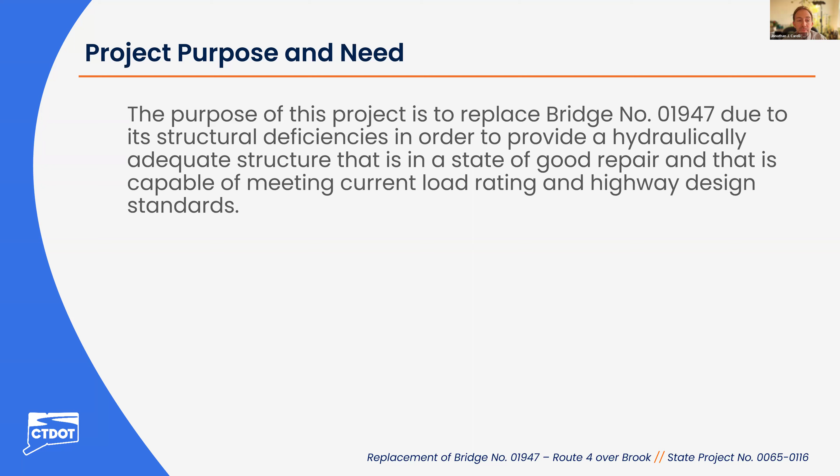The purpose of this project is to replace bridge number 1947 due to its structural deficiencies, in order to provide a hydraulically adequate structure that is in a state of good repair and is capable of meeting current load rating and highway design standards.

This is an aerial view of the structure. Route 4 goes west to east. The unnamed brook flows from north to south, as shown.

A couple things to note about this particular site. Just west of our bridge, there is a barn with a white roof. Currently, a portion of it is within the state's right of way, and it has been identified as potentially eligible for the National Register of Historic Places. For reference, the approximate location of the right of way line is where you see this tree line intersecting across the top.

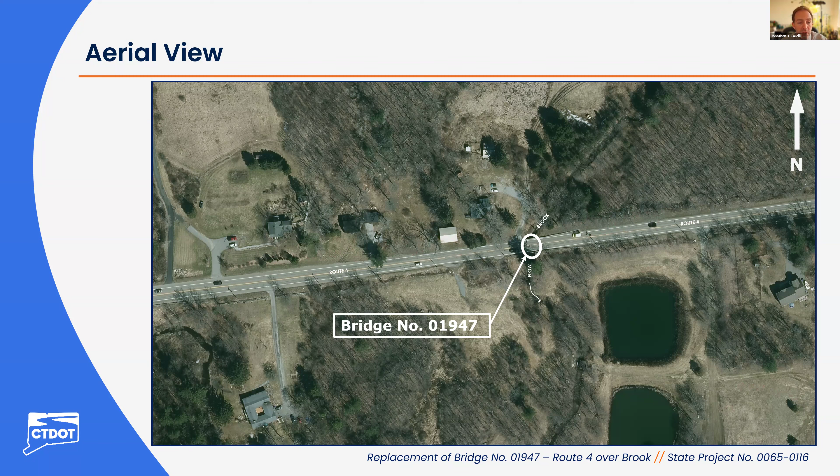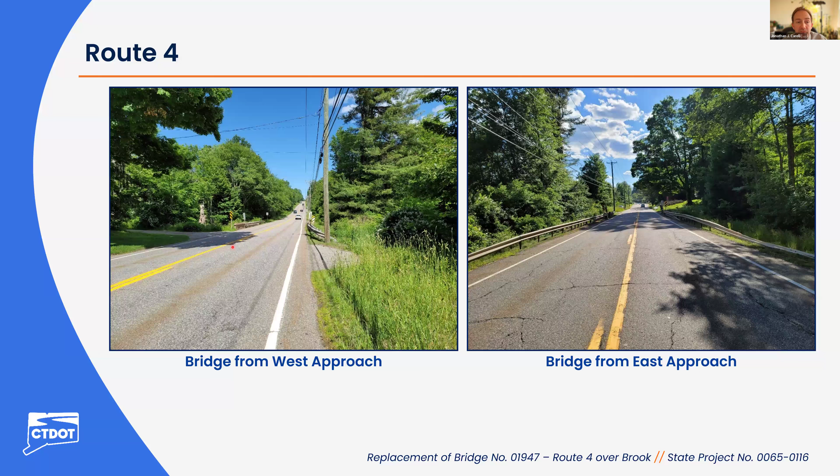Next, I'll go into some more photos of the project site. The photo here on the left is the bridge from the west approach. A few things to note: there is a driveway immediately adjacent to our structure on the left side, which is the northwest corner. Along the south edge of roadway, there are overhead utilities adjacent to the roadway.

This photo here on the right is the bridge from the east approach. Again, you see the utilities on the south side. And this section of Route 4 is a tangent section, so purely straight.

Looking downstream, the flow exits the structure perpendicular to the structure. There's a small drainage swale and a drainage outlet here that provides outlet for the drainage along the west approach. Right here in the corner, that's the southwest corner of the bridge.

And the photo on the right is of the downstream channel. Again, it goes perpendicular to the structure. Flow is very, very calm and gentle during normal conditions.

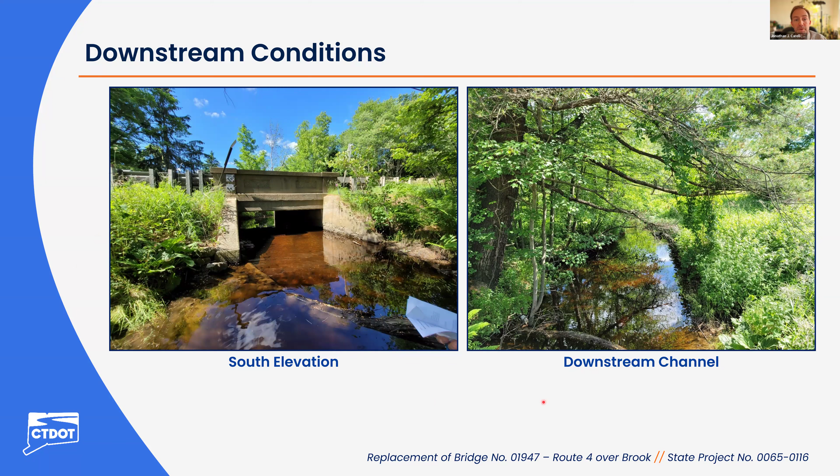Some facts about the existing bridge: it was constructed originally in 1927, and it provides a total travelway width of 28 feet 7 inches, split into two 12-foot lanes in the center, and then one shoulder is 2 feet, the other one's 2'7".

There's a fairly high traffic volume here at the site with 13,700 vehicles per day. It's currently posted for a speed of 45 miles an hour.

Provides a crossing for a drainage area of 0.81 square miles. The existing structure is hydraulically inadequate, so just during the design storm, it does reach the bottom side of the structure. The current structure type is a reinforced concrete slab that sets upon two reinforced concrete abutments on each side.

The primary deficiency for the structure, and the reason for replacement, is here at the water line, there's a lot of scale, so eroding of the concrete. And then underneath, the channel has washed out to also expose some of the footings. So something that would require a full replacement of a structure to address.

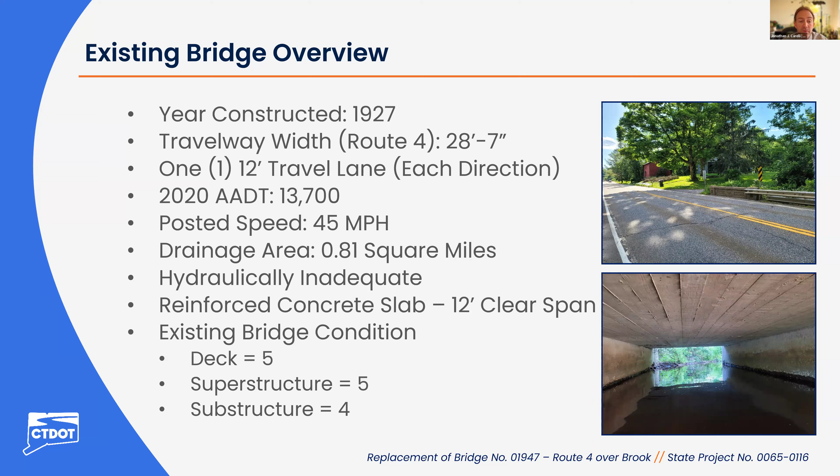So for this site, we are proposing to replace it with a 20-foot by 7-foot precast reinforced concrete box culvert. For this, we would actually be providing a slightly wider travelway with 11-foot lanes and 8-foot shoulders.

This will allow us to widen the roadway to provide bicycle access, or future bicycle access, to this section of Route 4 should it decide to be extended past the eastern project limits.

There'll be open bridge rails, so you'll be able to see the crossing as you're driving across, and basically a standard pavement profile on top of the structure.

For fisheries and concerns, to just mimic what's there currently, there'll be 2 feet of natural stream bed material placed within the stream. And a small skew will be introduced to the structure of 15 degrees just to improve that inlet condition to reduce that sharp bend.

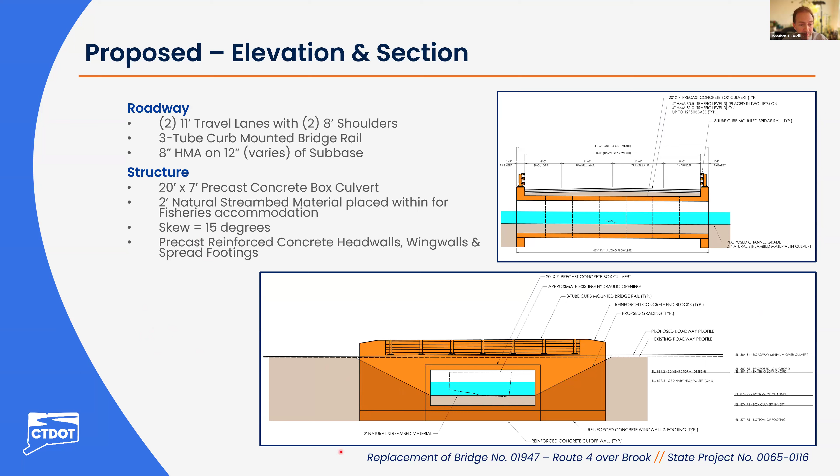Looking in plan, for us to do improvements within the project limits, there are a number of things we're doing. Immediately adjacent to the structure, where we're going to be removing the existing structure and putting in the proposed precast concrete box culverts, there'll be full depth construction of the roadway.

Because we are widening the structure, widening the cross section of the roadway at the structure, we'll also have to do several sections of full depth shoulder widening in each of the 4 corners to transition from the existing cross section to the proposed. There'll be metal guide rail attachments on 3 of the 4 corners of the bridge.

Adjacent to the temporary driveway here, there'll be a curved barrier wall to provide adequate protection of the blunt end in that corner.

There'll be new drainage all here along the west approach, as we will be slightly modifying the vertical profile of the roadway to improve drainage, so that it drains appropriately across the bridge into a new low point here that is away from the driveway next to the bridge.

For us to widen the roadway too, we'll also have to relocate utilities. As I mentioned before, there are utilities that run all along the south side of the roadway. We'll be relocating those utility poles further away from the roadway to the minimum distance required just to accommodate that widening.

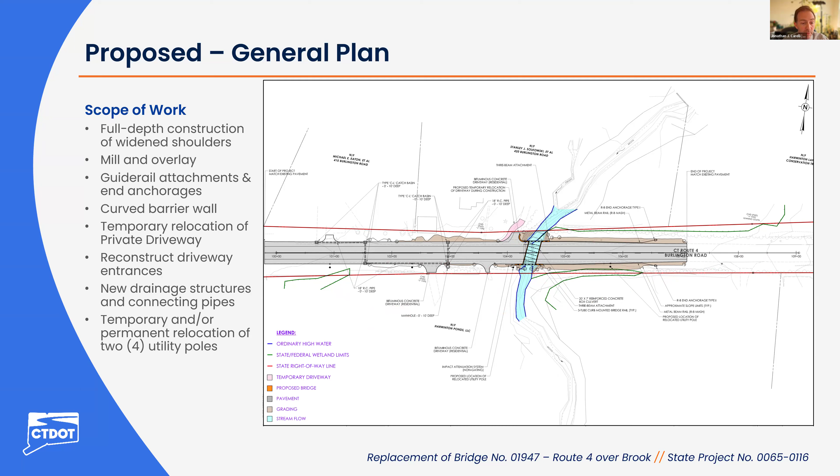So it's approximately 6 inches of raise on the east approach to accomplish that. Remaining sections all within the project limits will undergo mill and overlay to improve that pavement condition.

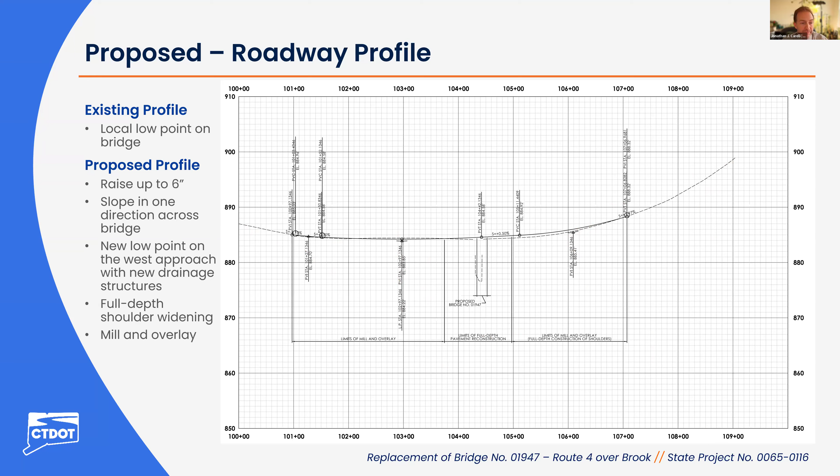For this, we anticipate the contractor to do the majority of the shoulder widening and a lot of the initial work in advance to prepare for a 2-week closure of Route 4, during which the contractor will remove the existing structure, wing walls, and walls, and install the new precast concrete box culvert, all the new wing walls, and other components of the bridge itself.

Given the high volume with 13,700 vehicles, this is preferred over any type of long-term alternating one-way staging, which would result in far more delays. We also recognize the fairly straight section of Route 4 has a tendency for high speeds, so this is both the safest and we believe the minimal impact to traffic possible for this project.

So for this detour, we're proposing to use the existing section of Route 4, Connecticut Route 69, down to US Highway 6, and then up to Route 72. Realistically, a lot of traffic going through this section will likely continue up Route 8 and go east further north of our bridge, or take a route further south. Same for traffic coming from the opposite direction.

So again, we don't anticipate this to be a significant impact to traffic, and it's far preferable to any type of alternating one-way traffic. The contractor would be allowed to close the road for up to 2 weeks. This would be at a time when school is not in session. Typically, we give the contractor a month's window in which to do the 2-week closure, for their optimal readiness and to pick the optimal conditions in which to do the detour.

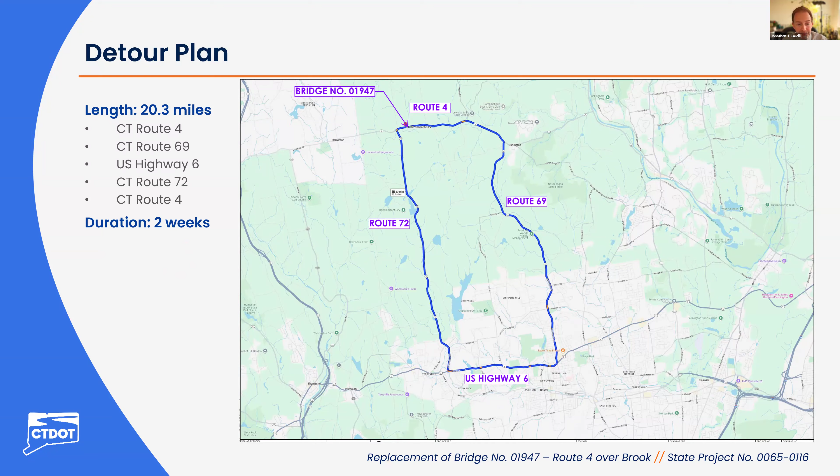For this particular project, there are very simple environmental permits. One is the U.S. Army Corps of Engineers self-verification form, and then the Connecticut DEEP General Permit for Water Resource Construction Activities - two basic inland wetland permits that have to do with the wetland impacts within the site.

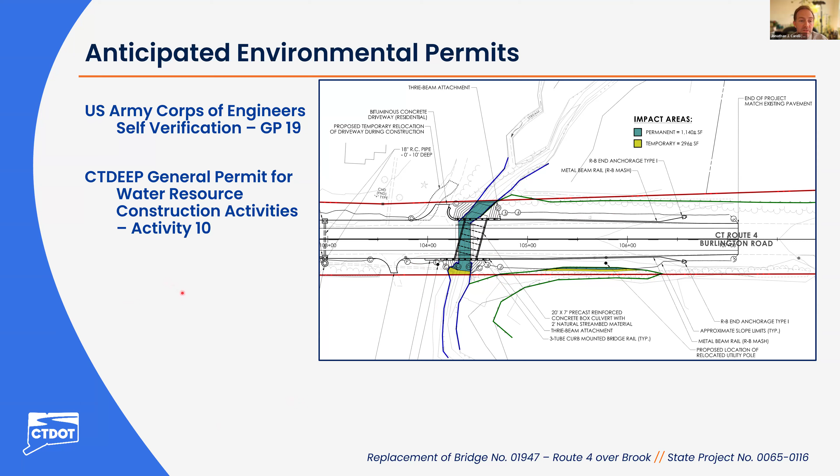Right now they're contained within the state's right of way. It just has to do with regrading of the channel to accommodate the new structure. And then for some of the approaches, just because we are widening the roadway, the transition requires us to bump out that fill slope a little bit.

Looking at utilities and rights of way - for utilities, I mentioned there are utilities along the south edge of the roadway. Four utility poles total will have to be temporarily and permanently relocated to accommodate the work, to allow cranes to get in there to set the new sections and remove existing portions of the bridge. There is a water main that runs along the north edge of Route 4, which is outside of the footprint of the existing and proposed structures, so we do not anticipate any impacts as a result of said water main.

For rights of way, there is a private barn partially located within the state's right of way, which may be potentially eligible for the National Register of Historic Places. All of our proposed grading terminates in front of said barn, so there are no impacts anticipated to that property as a result of this project.

The proposed structure and all proposed grading will be within the state's right of way, so there are no permanent easements for this project. There will be temporary construction easements, as the driveway in the northwest corner will have to be temporarily relocated to provide continuous access to it during construction, and especially during the roadway closure.

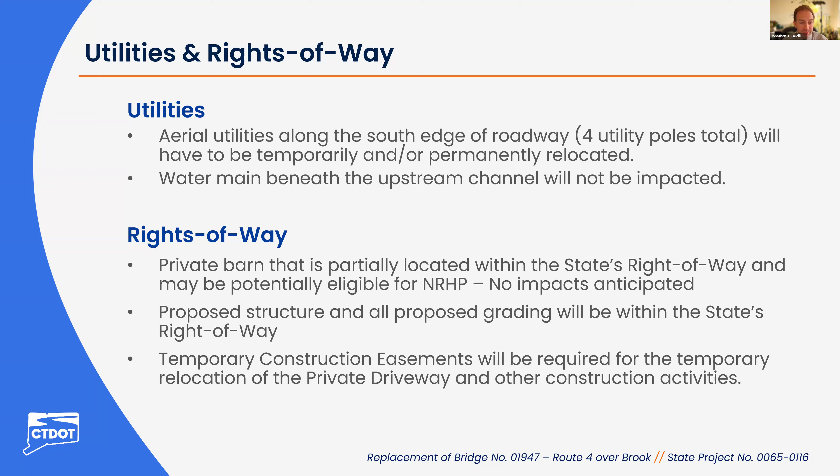And right now, I'll turn it over to Jack Carlson from the Connecticut Department of Transportation Rights of Way Office to go over the rights of way process.

Thank you, John. Good evening. My name is Jack Carlson, and I serve as Assistant Project Coordinator with the Department's Division of Rights of Way. Our office is responsible for acquiring the property rights necessary to carry out transportation projects.

As mentioned earlier in the presentation, this project will require the acquisition of property rights. I'd like to take a few minutes to walk you through our acquisition process, but before I begin, please note the specific right-of-way impacts are still being finalized and may change as the project design progresses. Additionally, any needed property rights will be acquired in accordance with Connecticut General Statutes Section 13A-73 and 13A-98E, as well as the Uniform Relocation Assistance and Real Property Acquisition Policies Act, commonly referred to as the Uniform Act. Next slide, please.

The acquisition process begins once the project design reaches a key development milestone and all impacts to private property have been determined. At this stage, our office sends each affected property owner a formal letter of intent to acquire, along with a property map that clearly outlines the specific property rights being acquired, as shown on the right side of your screen.

Next, we establish the fair market value of the required property rights. This valuation forms the basis of our offer of just compensation, which is provided to the property owner in writing. A rights-of-way agent will then be available to meet with the property owner to explain the project's details, discuss the specific impacts to their property, and go over the department's offer.

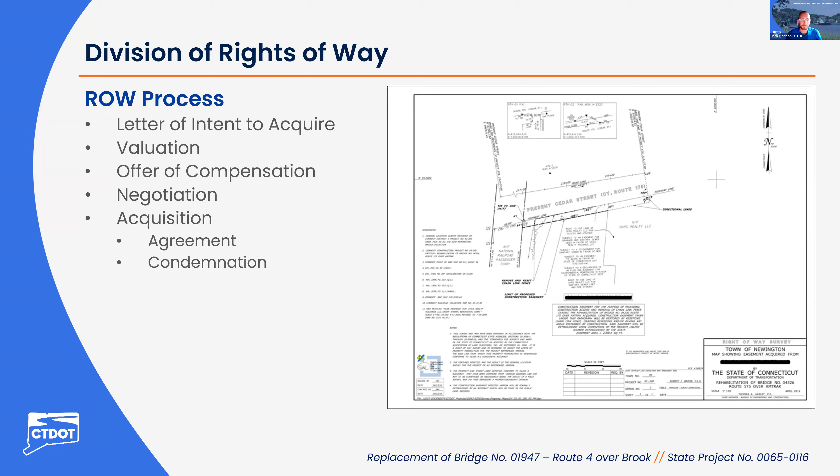I'll be happy to answer any questions about the right-of-way process during the Q&A session at the end of the presentation. And with that, I'll hand it back to Leslie. Thank you, Jack.

At this time, we are anticipating construction to begin in the spring of 2028 and be completed by the fall of 2028. We're currently estimating a construction cost of approximately $2,625,000.